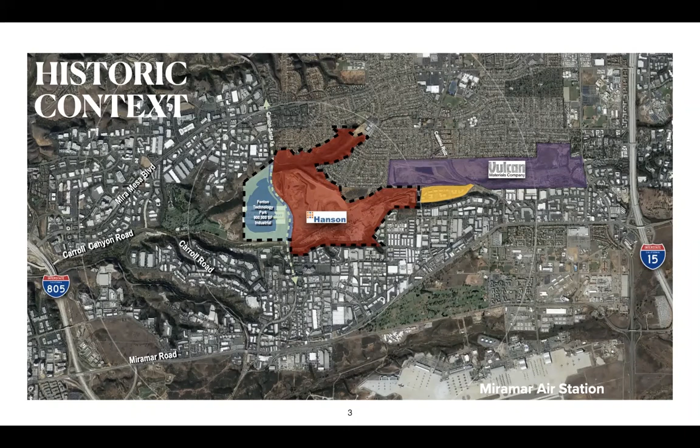The first root is legacy. The project site sits in District 6, straddling the border between Mira Mesa and Sorrento Valley. Historically, this area has been used as an open pit rock quarry for over 60 years. In 1994, while mining was ongoing, a post-extraction plan for the site was approved as the Carroll Canyon Master Plan, nested within the Mira Mesa Community Plan. Phase 1 of this master plan was the 900,000 square foot Fenton Technology Park, built in 2001, while the rest of the site remained an active mine operated by Hanson Aggregates. Mining is now complete, and the land is ready for the build-out of Phase 2 of the Carroll Canyon Master Plan. Since this plan was approved 25 years ago, a lot has changed in Mira Mesa and in San Diego.

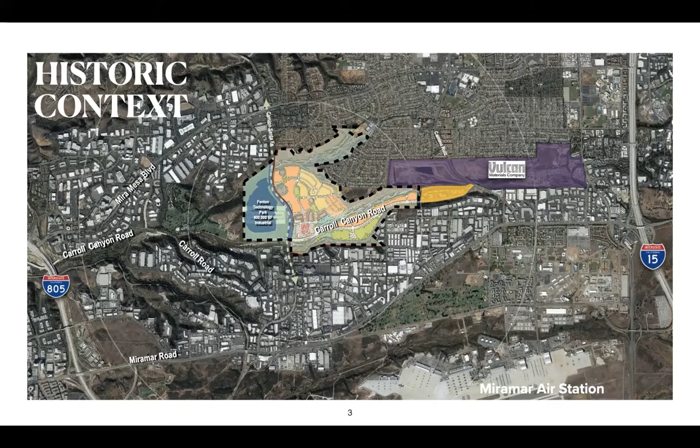For decades, the site has been inaccessible to the community. While active mining was underway, a diverse neighborhood grew around it: single-family homes to the north, an industrial park to the south, and San Diego's hub of research and innovation to the west. When mining ceased in December of 2016, it created an exciting opportunity to reevaluate the 1994 plan.

To that end, we began community outreach in 2017 to determine which components from the master plan still made sense and which needed updating to adapt to today's needs. More than 700 people participated in our outreach process, and the team worked with over 30 community organizations and 7 state, local, and federal agencies. Working with these groups and individuals deeply influenced how we designed.

The biggest thing we heard was Mira Mesa's need for a new community park. We also noted the local desire to maximize open space, maintain the 1,800 units from the approved master plan, offer residential opportunities in the area for growing families, and provide diverse entertainment options and social gathering places which incorporate art into an experience. Throughout this presentation, you'll see the legacy of these conversations reflected in 3Roots.

For the last 3.5 years, we've kept the community abreast of the project's progress and demonstrated how the proposed changes reflect their feedback. This culminated in unanimous support from the Mira Mesa Community Planning Group last year.

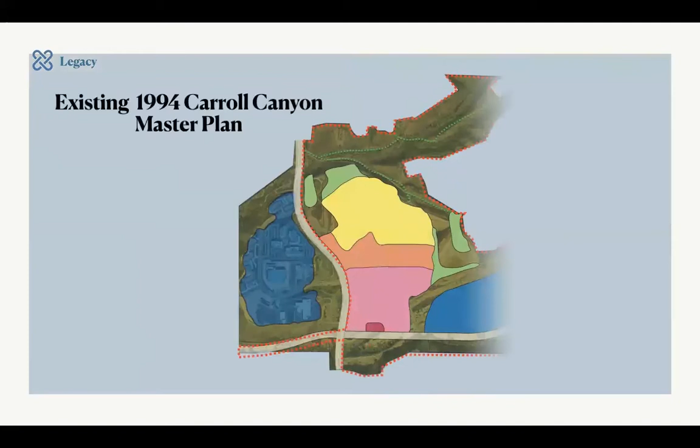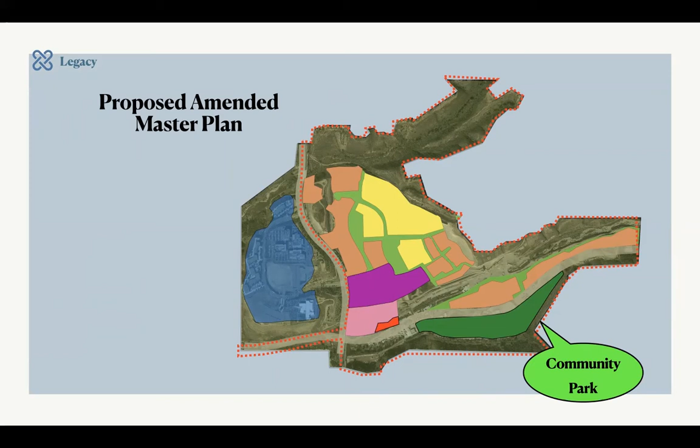This image shows the 1994 Carroll Canyon Master Plan compared to the proposed amendments. In addition to providing 23 acres for the long-awaited community park, 3Roots expands the residential footprint, allowing for diversity of housing options and the incorporation of a network of publicly accessible parks and trails woven throughout the community.

As a result, a holistic design approach for a porous and accessible master plan came together, rooted by an on-site publicly accessible trail system, linking a variety of residential and non-residential uses, which face onto paseos, parks, and open spaces. The design intends to prioritize pedestrians and bicycles and establishes a layering effect between public, semi-public, and private realms.

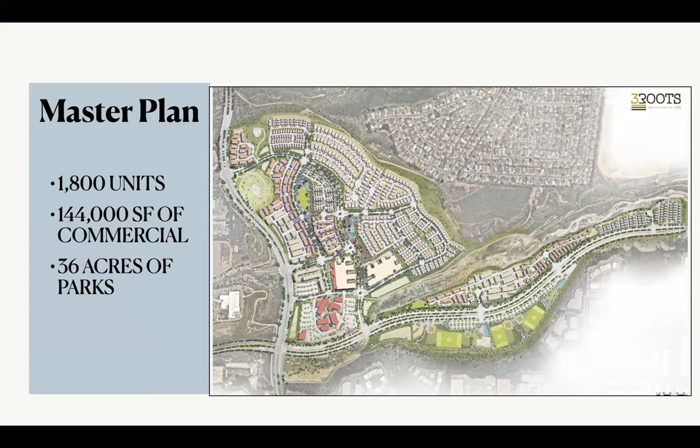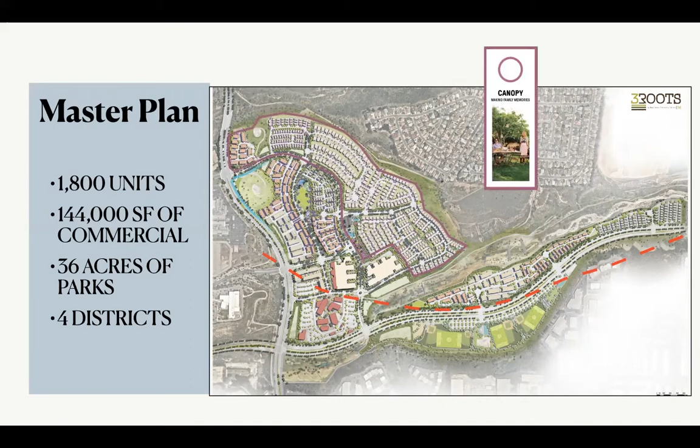Along the edges, and in response to the single-family detached neighborhood to the north, the least intense uses are found. As the project moves towards the urban core, a mix of uses are established. An airport CNEL noise contour delineates a strictly non-residential zone along the south edge of the site due to the proximity of MCAS Miramar. In order to enhance the experience and respond to various edge conditions, the plan forms various districts, each with unique differentiating elements characterized by pops of color in the landscape, types of residential offerings, and passive and active recreational themes.

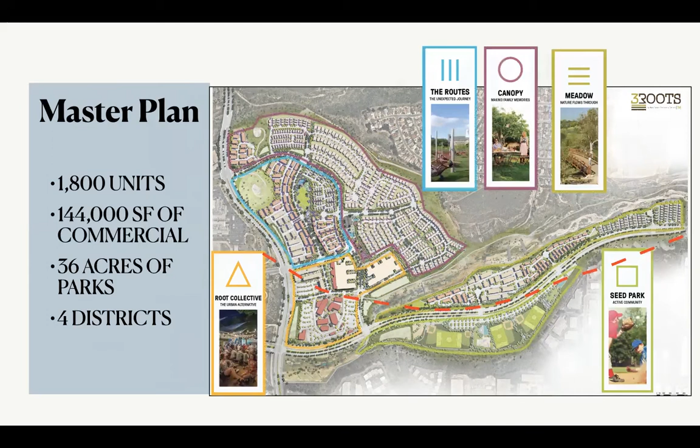The second pillar of 3Roots is responsibility. In keeping with the original Carroll Canyon Master Plan and fulfilling the responsibility of mining reclamation, more than 200 acres, or roughly 60% of the site, will be preserved as open space. Of that 200, 180 acres will be added to the city's multiple species conservation program.

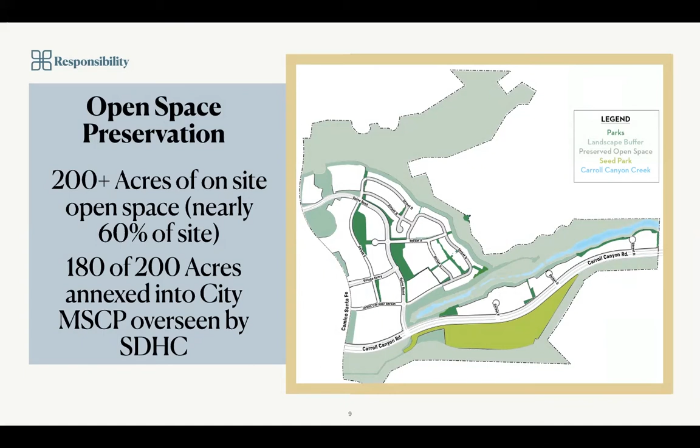In response to community feedback, we've added an overlook point at the end of Parkdale Avenue so residents of the existing neighborhood can access the parks, trails, and entertainment offerings within 3Roots. This pedestrian connection can also be used by children looking to walk to the nearby Salk Elementary School.

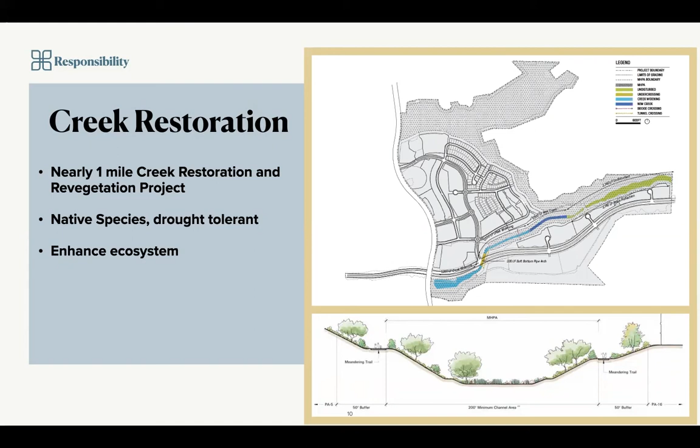Currently, the on-site section of Carroll Canyon Creek has been impacted by decades of mining activities. The project's on-site creek restoration will protect, reconnect, and enhance the existing creek channel for nearly 1 mile. The effort includes removing an existing underground conveyance pipe and returning creek flow to a naturally vegetated open channel. Pathways adjacent to the creek and outside the sensitive habitat zone have been established. The restoration of Carroll Canyon Creek is a key piece of the reclamation of this land for generations to enjoy.

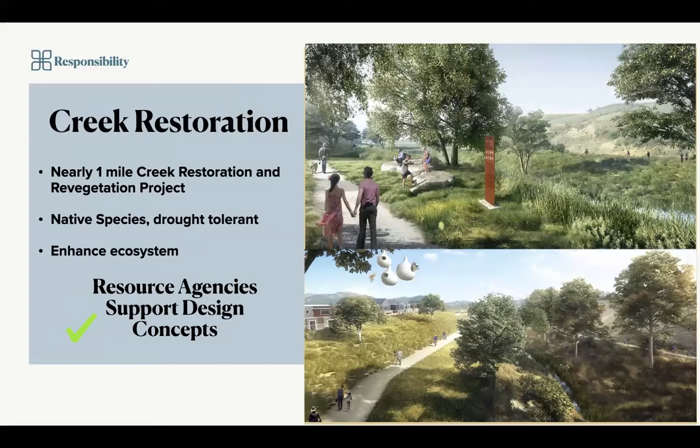By maintaining the 1,800 units planned in the 1994 Carroll Canyon Master Plan, yet reducing the residential footprint, 3Roots allows for a wider range of housing options, including on-site affordable housing in compliance with San Diego's Inclusionary Housing Ordinance.

There are 10 different product types accommodating a variety of life stages, from apartments, condos, and small lot single-family detached homes. With a development team consisting of 3 local builders, the partnership elected to advance the final architecture depicted in the images you see here.

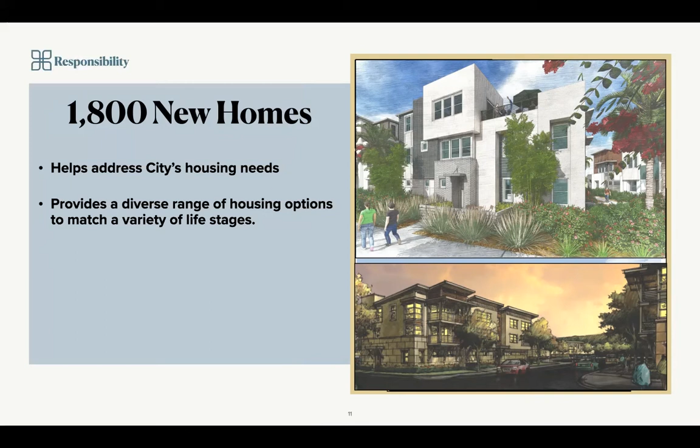The San Diego Regional Chamber endorsed 3Roots for providing this range of much-needed housing close to regional job centers.

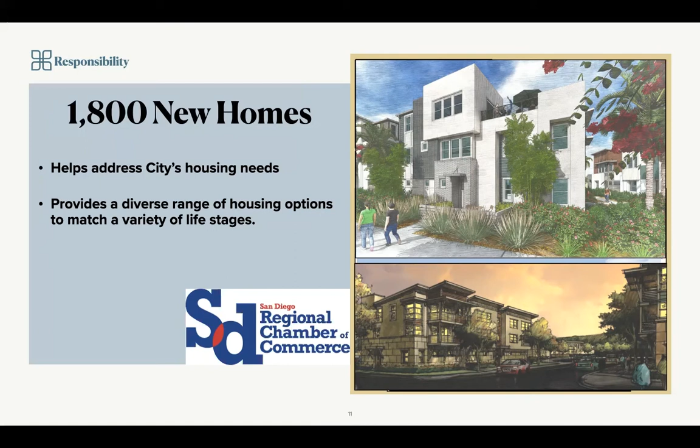As part of the application process, all floor plans and elevations have been submitted to deliver homes as quickly as possible. In addition, 3Roots has selected a local apartment developer whose designs are depicted here and ready to submit for conformance with design guidelines.

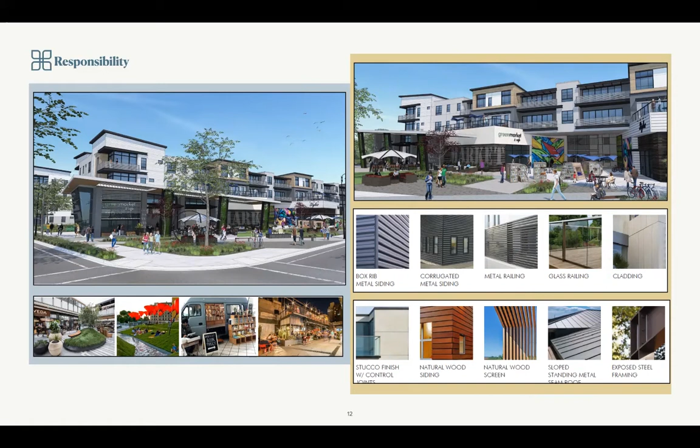The third and final root philosophy is connectivity. As you can see here, the project site is within 5 miles, or a 20-minute bike shed, of San Diego's largest employers.

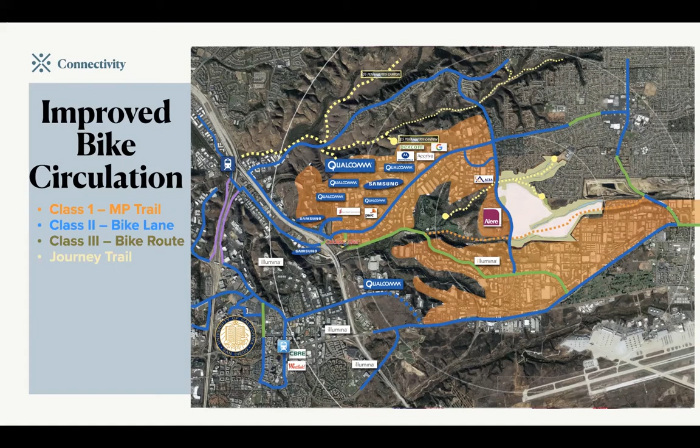Because of this strategic location, the project has been designed from the outside in, ensuring the project's on-site and off-site improvements facilitate pedestrian and bicycle circulation. 3Roots has been endorsed by the San Diego Bike Coalition in recognition of these components.

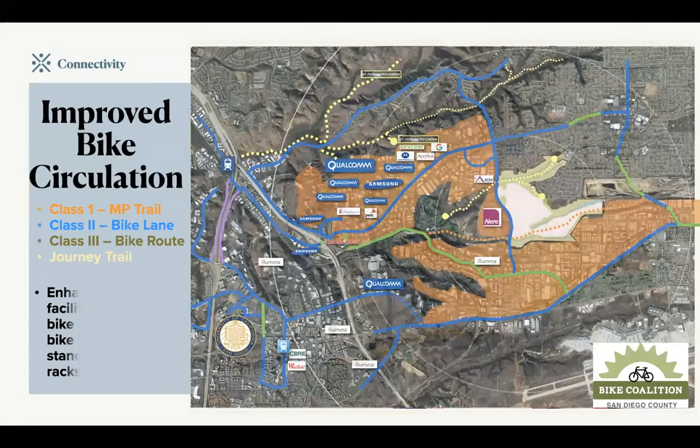On-site features include bike lanes rather than on-street parking, and facilities offering bike repair, maintenance, share, and security are located throughout the project. The site itself is not an island.

In fact, the route of connectivity creates an open invitation to neighboring residences and businesses through nearly 8 miles of publicly accessible trails.

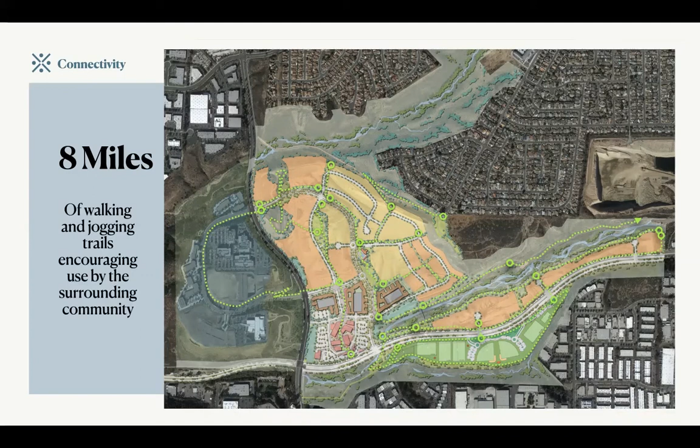This includes a pedestrian access under Carroll Canyon Road for maximum safety, and hopefully inspires less vehicular use to access the sports park.

Beyond the employers that are within walking and biking distance, there are 3 main transit centers which connect 3Roots to regional employment areas via the coaster, the trolley, and bus rapid transit.

In addition, the project team worked closely with MTS and SANDAG, and the project design responds to the ongoing Mira Mesa Community Plan update by including nearly 4 acres for a dedicated future bus route and stop along the center of Carroll Canyon Road through the 3Roots site.

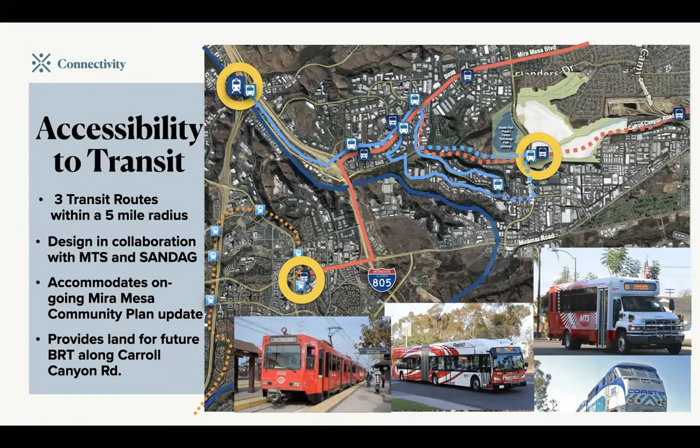Recently, the project was granted a Move Alliance certification from Circulate San Diego. That said, recognizing that the transportation industry is changing rapidly, a 1.3-acre site adjacent to Carroll Canyon Road and the future BRT stop will be dedicated to the current and future components of transit, building habits for residents and visitors alike.

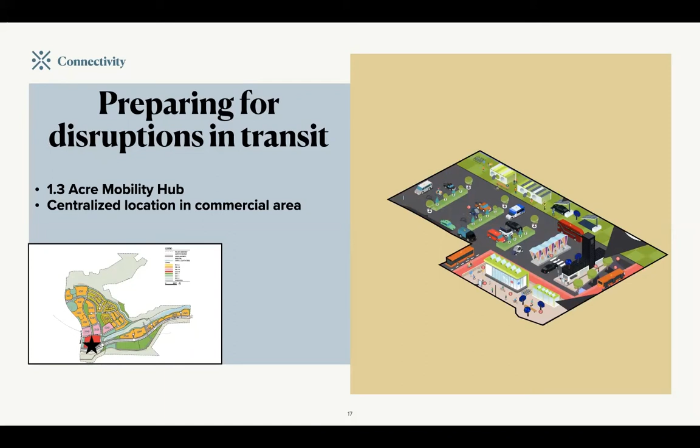Be it rideshare, car share, bike share, employer shuttles, centralized package drop-off and pickup, the vision of the mobility hub is to create a central location offering a variety of transportation alternatives.

A location flexible to current trends and future disruptions.

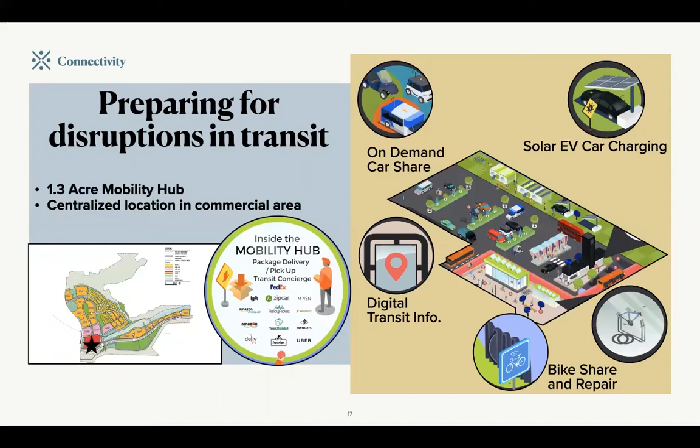Similar to anticipating disruptions in transit, the retail component of the project is reimagined. The Root Collective, in the heart of 3Roots, reflects the ingenuity and diversity of Mira Mesa with creative maker spaces, public art, and architecture.

Industrial nature, reminiscent of the local craft breweries and the former mining operation. All paths, paseos, and parks woven throughout the community lead directly to the Root Collective, promoting walkability and decreasing vehicular dependence for residents, neighbors, nearby employers, and surrounding neighborhoods.

Thus bringing to the community a walkable, integrated space that is very different than the current local offerings.

A series of design guidelines coordinated amongst the 3Roots design team and city staff ensures that the Root Collective will become the energy center of the site.

Designed for public congregation, celebration, creativity, and connectivity, and punctuated by public art and informal outdoor spaces, the Root Collective really becomes a collection of sensory experiences.

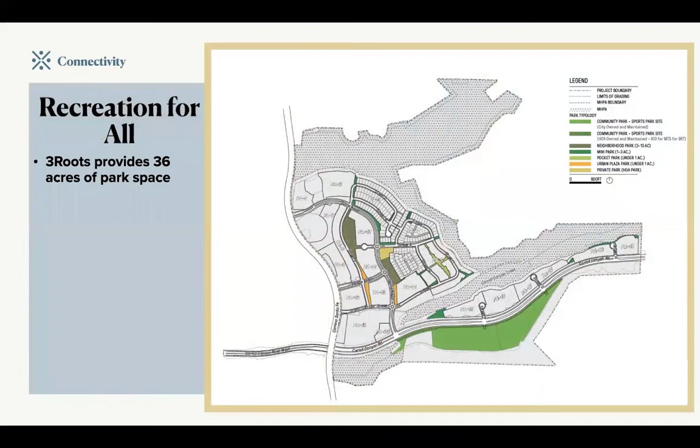At 3Roots, the park system is the framework for the community. The 4 districts of 3Roots are linked together by 36 acres of parks, paseos, each with their own identity.

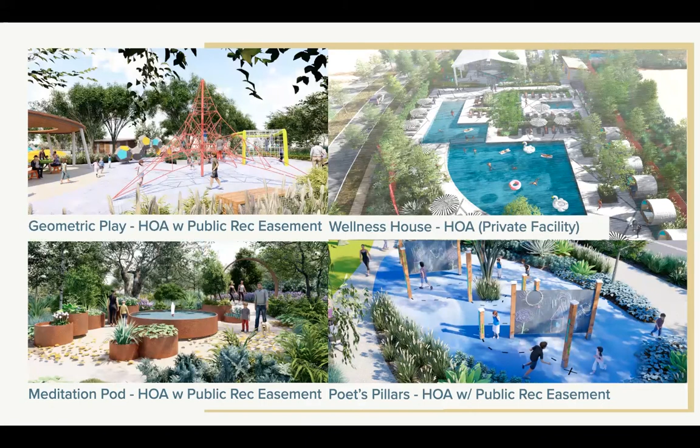While the project does have a private facility dedicated to wellness with a recreation center and pool, nearly 34 acres of parks are publicly accessible, nearly doubling the amount of park space originally envisioned in the 1994 Carroll Canyon Master Plan.

Lastly, 3Roots is proud to dedicate 23 acres of developable land to host Mira Mesa's highly demanded and long-awaited 3rd community park. In partnership with City Parks and Rec and the Mira Mesa Recreational Advisory Group, we accelerated the GDP design process by hosting a series of public workshops in the summer of 2018.

We knew how important this new park is to the community, so we wanted to expedite this process for them as much as possible.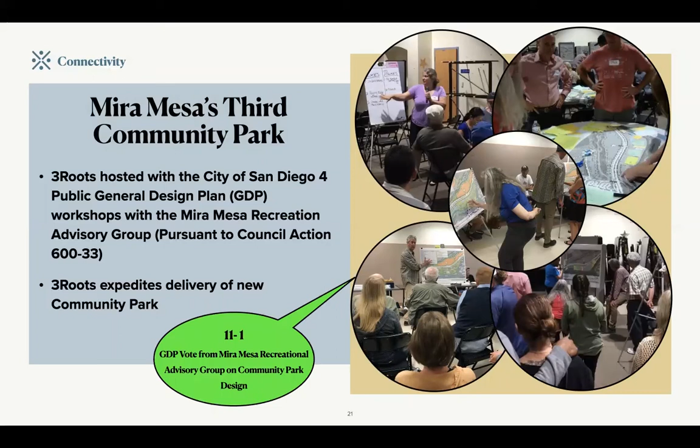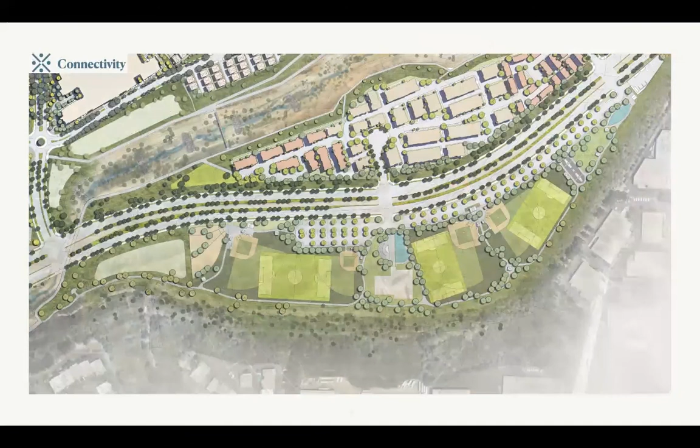Mesa Canyon Community Partners is not only committed to dedicating land and designing the park, but also to constructing this public community facility as part of the 3Roots project.

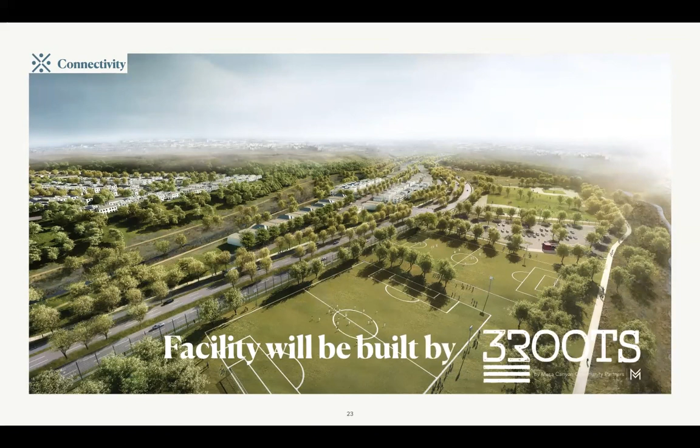We are very proud to introduce the vision for 3Roots to you today. After more than 3 years of planning, collaboration with city and regional stakeholders, and community engagement, we believe this plan responsibly reclaims more than 400 acres for the community's benefit while meeting the current and future goals of the city of San Diego.

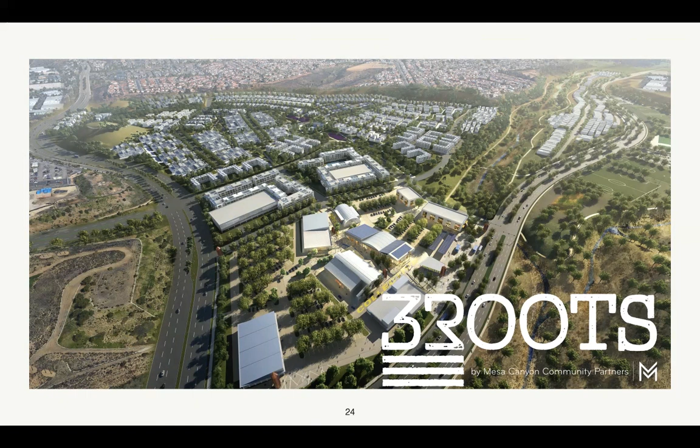For a master plan physically and philosophically rooted in legacy, responsibility, and connectivity, we ask that you adopt this Planning Commission resolution and recommend approval of the 3Roots project. Our team is available to answer any questions you may have, and we thank you for your time.